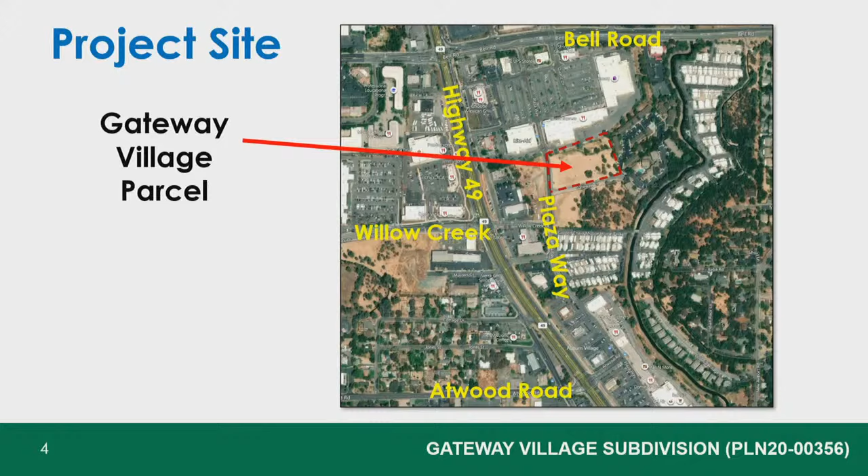So this project is located not too far from us today. It's just over to the east of us, right behind the Rock Creek Shopping Center. As you can see here, we have Bell Road, Highway 49. This is an undeveloped parcel next to some existing apartment complexes. It is just under 3 acres, 2.94 acres.

As you can see, this is an aerial of the project site. And in the middle, just to point this out for you, they are stockpiling soil out there, and they did get a grading permit prior to that, so they got all the proper permissions, just to give you a good idea of how the project stands today prior to development. And there's some on the north and the east sides, there's some existing oak woodland.

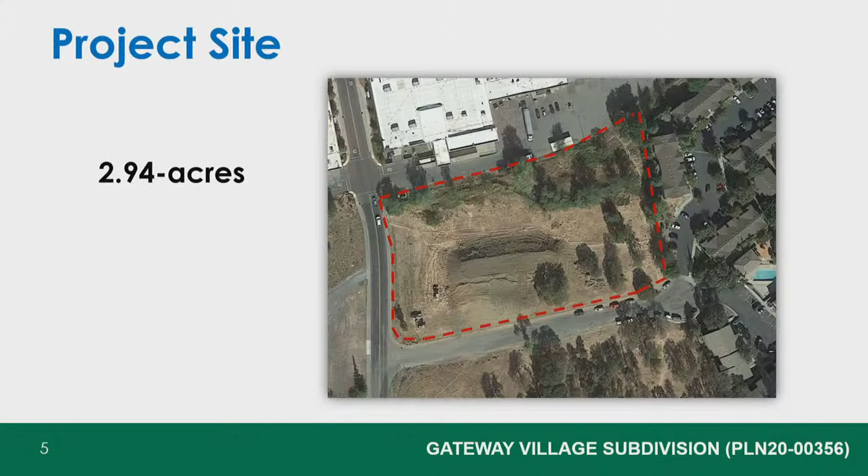This project is within the Auburn-Bowman Community Plan and is designated commercial. So commercial land use is adjacent to the west, north, and south, and to the east is high-density residential. Next is the zoning. So this parcel is zoned commercial planned development, combining design scenic corridor, combining airport overflight zone. And again, to the west, north, and south has the same zoning, and to the east is residential multifamily.

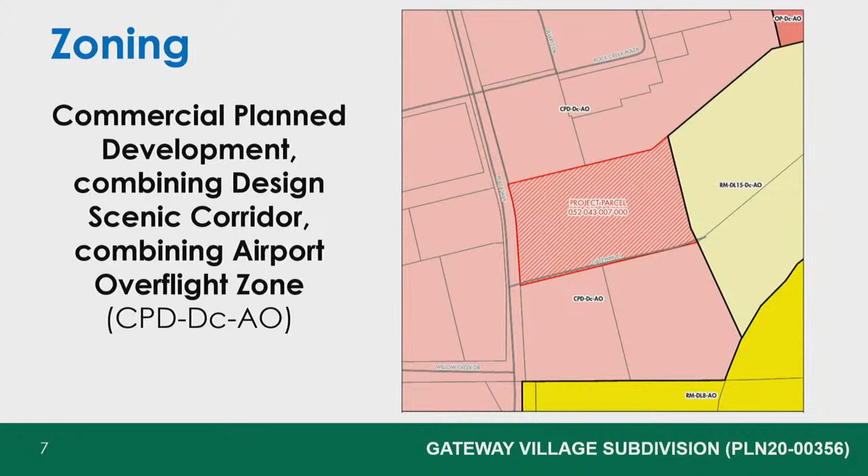So here's a bit of a zoom in to the vicinity map. You can see some of the apartments and some of the commercial development nearby. To the south, we have the Gateway Commons. This is a subdivision that came to you a couple of years ago. They just recently started construction on that, so construction is full steam ahead. To the east, you see the apartments over there. To the north, Rock Creek. Then there's some undeveloped parcels adjacent to the west and the southwest.

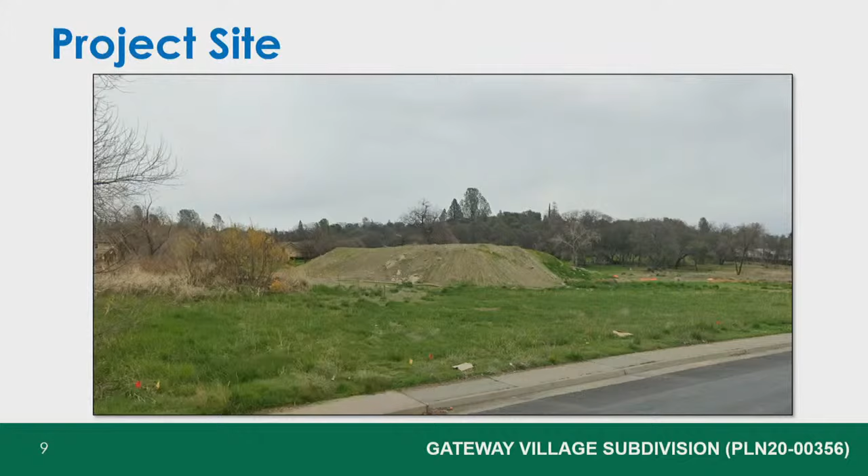Here's some photographs of the site. As you can see, the soil stockpile is very prominent. It does have some habitat, but it's urban habitat, very fragmented. To the west is Plaza Way, and to the right, Gateway leads to the adjacent apartments.

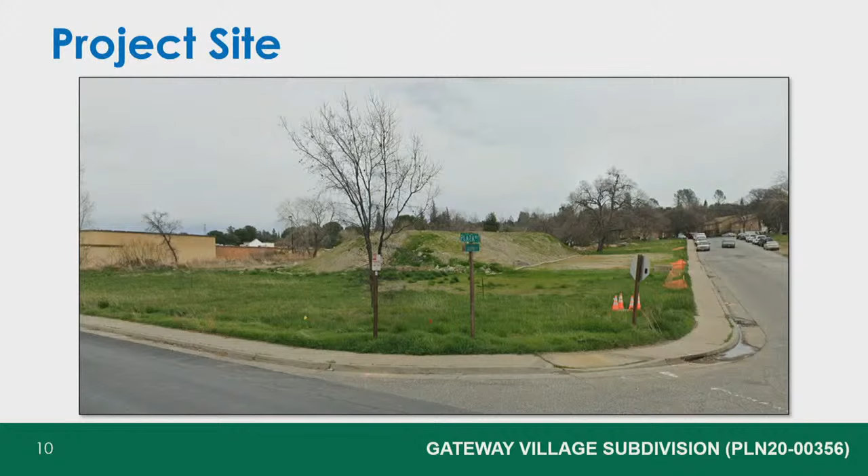I wanted to overlay the subdivision on the aerial just to see the physical impacts of this development. As you can see, it's mainly grassland and the disturbed area where the stockpile is, but you can see the amount of trees that will be removed with the project.

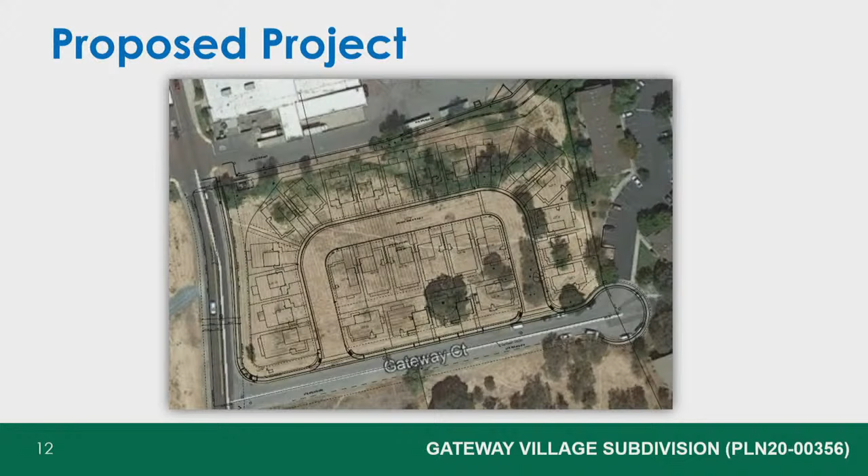The requested entitlements include a rezone from the commercial planned development combining design scenic corridor and airport overflight to the same district, but adding the town center commercial. Next is a tentative subdivision map to divide the 2.9 acre site into 24 residential units, and a conditional use permit to allow for a master planned detached single-family residential project within the CPD zone.

Going into a little detail about the town center combining district - this allows for a variety of housing types along commercial uses. With this district, you would need approval of a conditional use permit as well, and the development standards for the site are established through that conditional use permit. So with the TC combining district, detached single-family dwellings would be allowed on this parcel.

So 10 feet to the entrance to the home, 20 feet to the garage. Rear setback is 3 feet. Side setback is 3 feet as well, and a lot coverage of 50%.

Here are some of the house plans. This is one of the smaller ones, 2 bedrooms, about 1,000 square feet. These have a 2-car garage. The architecture style will match the Gateway Commons project as well, with the stucco and the stone columns.

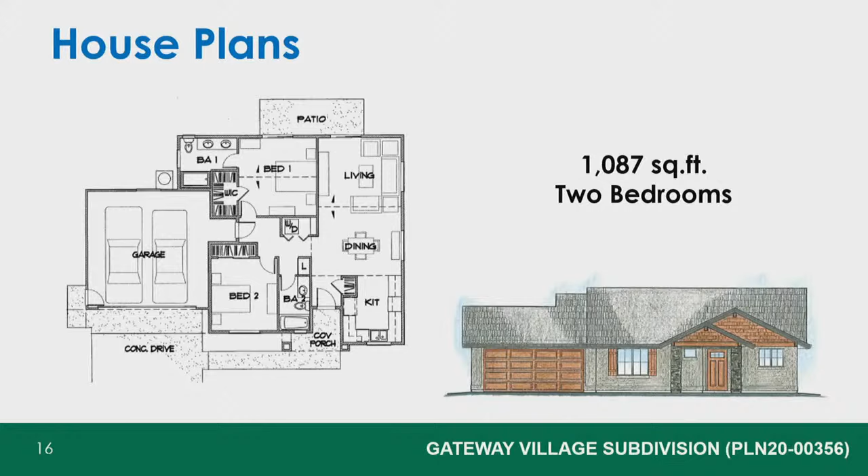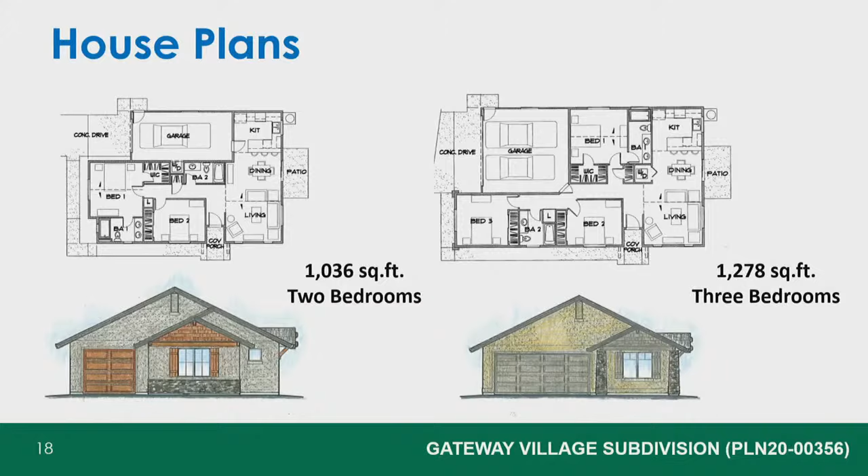Next is the 3-bedroom, almost 1,600 square feet with a 2-car garage, and this one is 2-story. A couple more - we have the 1,000 square foot 2-bedroom with a 1-car garage, and about a 1,300 square foot 3-bedroom with a 2-car garage. They all have different colors, but the scheme is similar with the stucco and the stone columns.

The project along the frontage also proposes landscape - they have shrubs, trees, and ground covers. All will have to be compliant with our water efficient landscape ordinance.

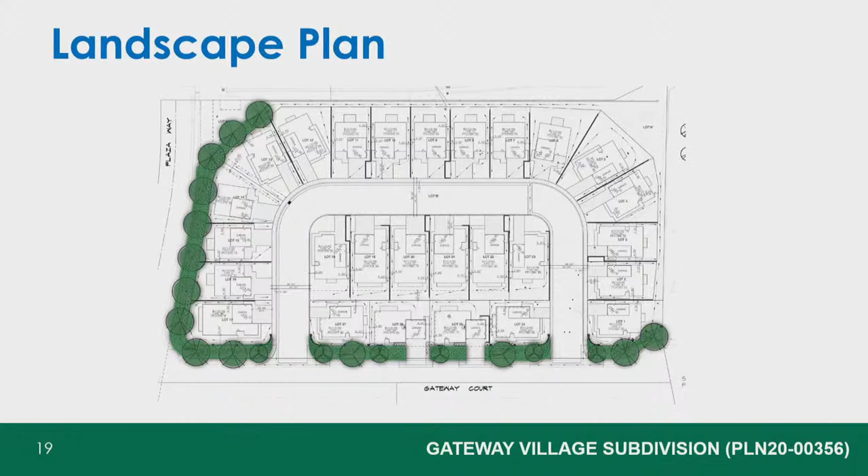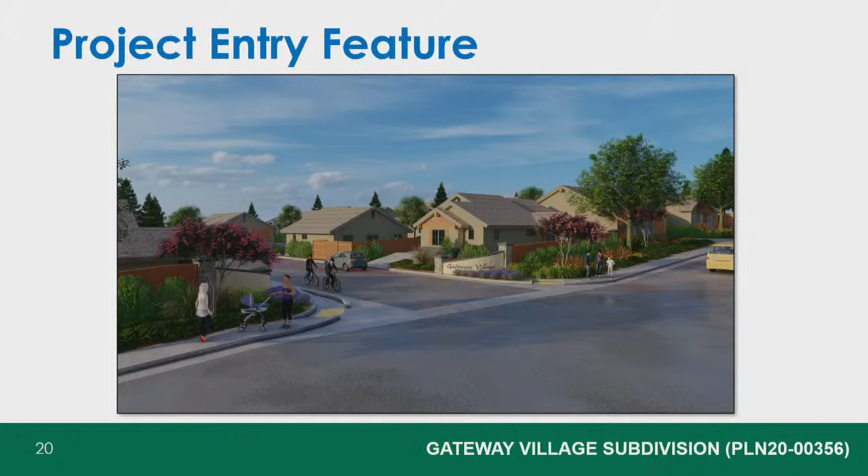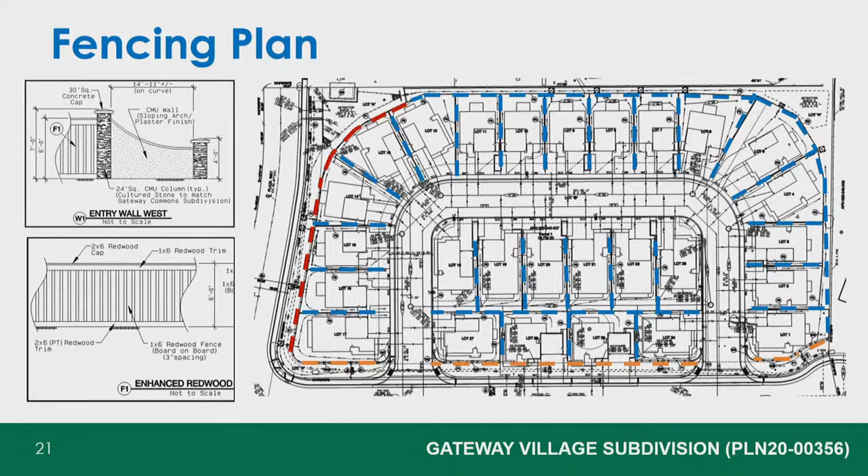That photograph did have some fencing, but going into a little more detail - on the south side of the site, we'll have the W1 call out, which will have the redwood fence with stone columns and the entranceway where we'll have the sign. To the west, along the frontage of Plaza, we'll have enhanced redwood fences with a cap on top. To the north and east side, and within the individual homes, we'll have redwood fencing. There is an existing fence along the property line to the east.

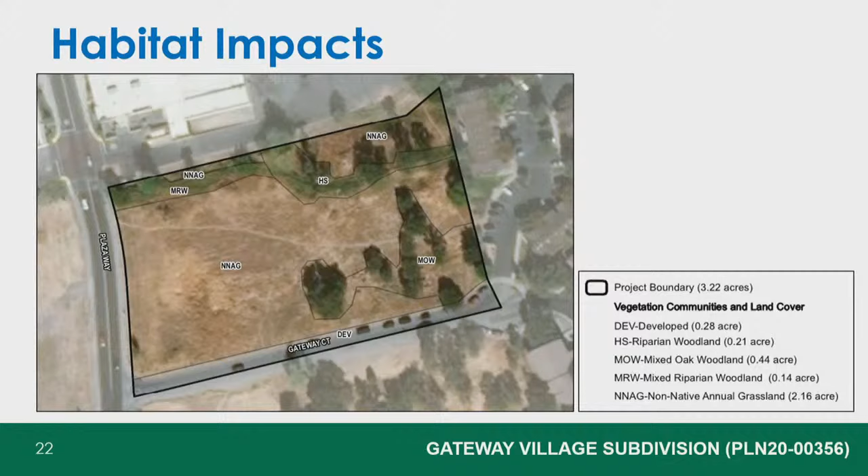Okay, so we did analyze the traffic with this project. The residential development is allowed in the zoning district, and the land use and trip generation is expected to be consistent with that zoning. The project is proposed to have about 255 daily trips.

We did do a VMT analysis under CEQA, and since the type of project, market rate affordable housing, is also in a low VMT generating area, it would be screened out for VMT because of the low VMT.

In terms of low VMT, due to its location, there's a lot of amenities nearby. We have grocery stores, restaurants, all which can be walked to. So we did go on the walk score. This is basically a website you can go on, type in your address, and it rates the parcel's location based on proximity to transit and destinations.

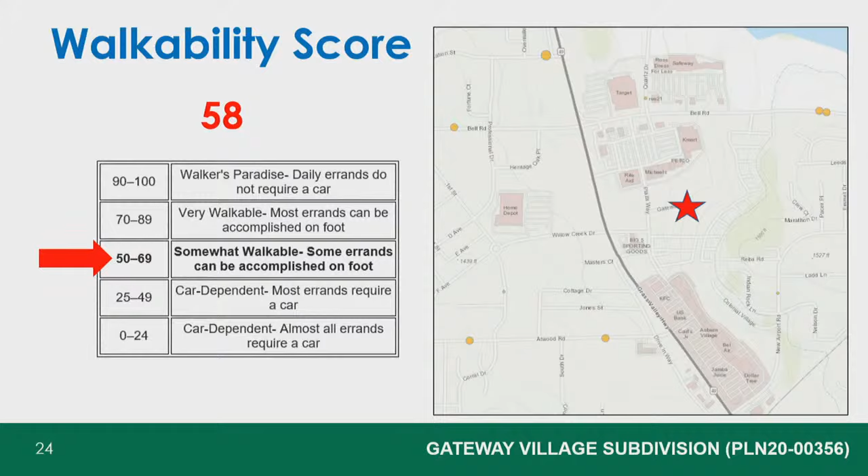So we got a score of 58, so it's somewhat walkable. Some places will be walkable. Where the old Kmart building is, we'll have a grocery store there, and Harbor Freight and Old Navy. So we have some more destinations coming in that this may not have considered because they're under construction now, but it is walkable. There's a sidewalk right in front of the project, so folks can walk and avoid vehicle trips.

So some additional information of what this score is based on - there's dining, shopping, and groceries nearby.

So this went to the MAC as an action item on June 14th. Some of the items that were raised from the MAC were the affordability of the units and the type of deed restrictions. As I said at the MAC, these won't be deed restricted, they'll just be affordable by design. So the MAC recommended approval, 5 to 1 to 1.

Second, approve a rezone to add the town center combining district to the site, and approve the subdivision map, which will allow for a subdivision of 2.94 acres into a 27 lot residential development, and approve the conditional use permit for a detached single-family residential development within the town center combining district.

This is subject to the findings and conditions of approval in the staff report in the errata. I am available for any questions.

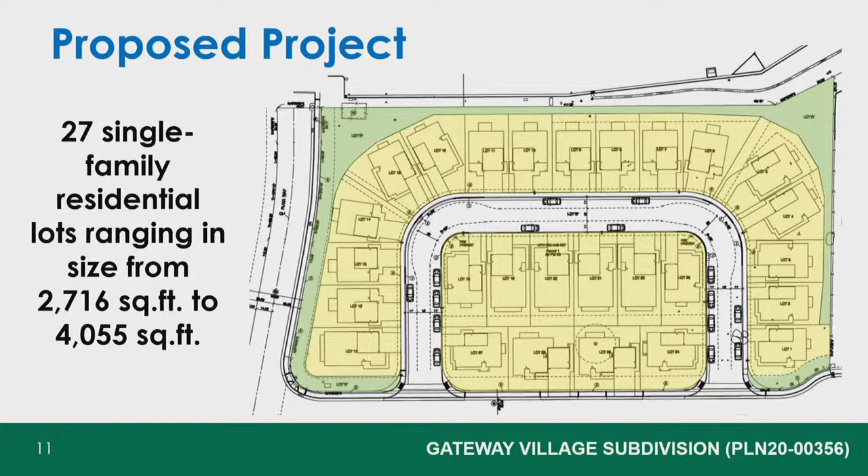Okay. That was my only question. Thank you, appreciate it.

Just curious, Bennett, what are the price range they're looking at selling these for? So I did discuss that with the applicant. I think with the construction logistics right now, they just don't have a firm price, but I think the intention of the project is as low as possible, just to be an attainable housing project. So it's something they're working on, but with ever-changing construction costs, I don't think they have a firm number.

And then another question, I guess, for you or for EJ's. I believe this is going to be a recommendation to the board because we're looking at modifying the zoning code. That is correct. Okay.

One more question on the drainage. Who's gonna maintain that? The homeowners association.

Okay, thanks. Bennett, just a quick question, really more education than anything else for me. Gateway Court is a private road, right? So what I'm curious about is, and there was a recommendation in one of the letters that came in that said the county should probably take this road over with this project. So I'm just curious about how that works when you have this private road and a new development going in here. Are there any rules that apply from a county perspective?

Is there any point at which we might consider taking that over? How does that work? All right, Phil Franz again with Engineering and Surveying.

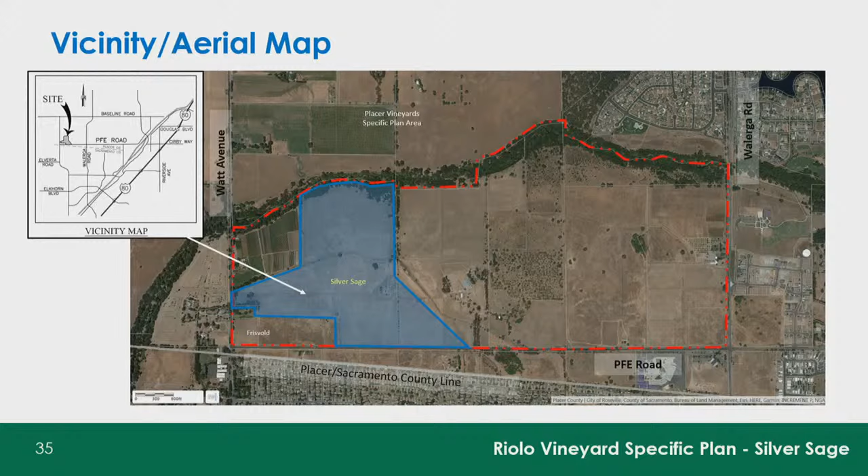The item before you today is the Silver Sage Subdivision, a Phase 3 project under the Riolo Vineyard specific plan. I'll start with an overview: it's located in the southwest portion of Placer County within the Dry Creek West Placer Community Plan area. This map shows the Silver Sage property in relation to the specific plan area, located north of PFE Road between Watt Avenue and Walerga, with Dry Creek forming the northern boundary.

The Silver Sage property is zoned Riolo Vineyard specific plan, similar to most other properties in the specific plan area. The plan covers a total of 525 acres, with ultimate development of 933 residential units over various phases, including open space, recreational, agricultural, and commercial uses. It was approved in 2009, subsequently amended in 2015 to address land use and zoning modifications. The plan went through a comprehensive environmental review, including certifying an EIR and a later addendum to address the updated specific plan. Water, sewer, and drainage master plans were also prepared.

Since 2009, three subdivisions have been approved and are under construction. Mariposa is near completion with 107 single-family residential lots, many of which have since been sold. Glen Willow will have 177 lots, and Mason Trails will have 170 lots. The Frisvold subdivision is currently in staff review, located just southwest of Silver Sage, and will have 118 total residential lots.

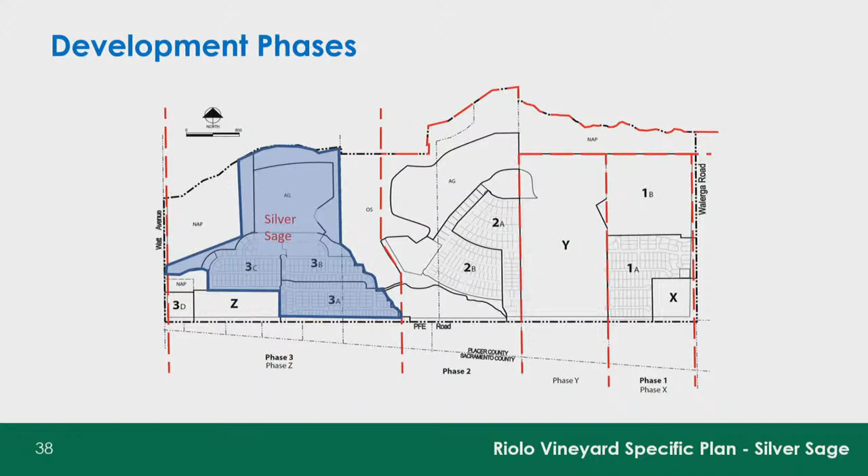Development under the specific plan is occurring through several phases in an east to west direction. Mariposa was the first phase, Glen Willow followed as phase 2, and Silver Sage will be phase 3. Other phases include Mason Trails and Frisvold.

There are two entitlements associated with the Silver Sage project: a tentative map and an administrative modification. The tentative map encompasses 113.9 acres and will include 163 low-density residential lots, as well as 117 medium-density residential lots, ranging in size from 2,200 to 5,500 square feet.

On-site amenities include 2 neighborhood parks, an agricultural lot located north of the proposed residential development, which would allow row crops or grazing and would be owned and maintained by the HOA. There's also an open space lot and a wetland preserve lot located to the northeast of the property. The 2 points of access on the property would be off of PFE Road on C and G streets.

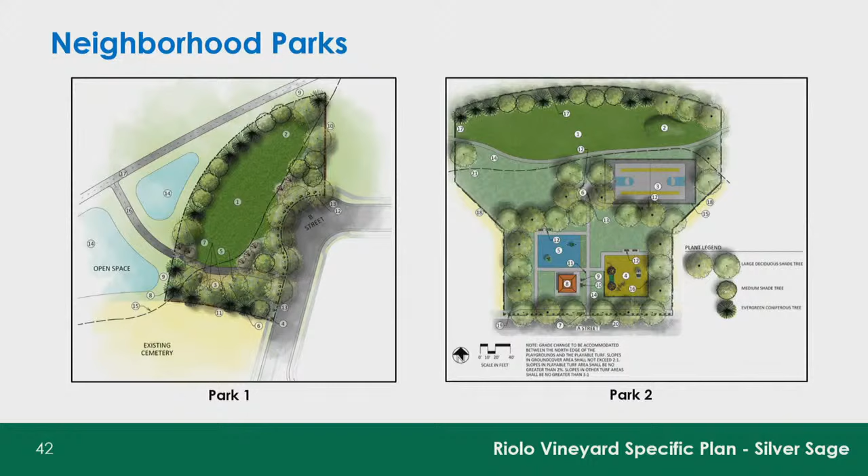This slide shows a detailed view of the two neighborhood parks. Park 1 is on the west side of the property, approximately 1 acre, and will include a pedestrian path linkage to a Class 1 trail that ultimately goes to Dry Creek to the north. Park 2 is approximately 2 acres and will include a basketball court, open turf play area, and tot play area. It also includes a path providing connection leading to Dry Creek.

Here's the fencing plan for the subdivision. Along PFE Road, there will be community wall fencing, basically a CMU brick wall with stone veneer, similar to what's been constructed for the adjacent subdivisions. There will be open view fencing for the residential lots facing the open space, which is your typical black wrought iron fencing. The open space areas will have standard post and cable fencing, and lastly, the agricultural fencing would consist of a 3-rail wooden fence.

There they are, sorry about that - I was wondering where they were coming from. So you can see the different fencing types here.

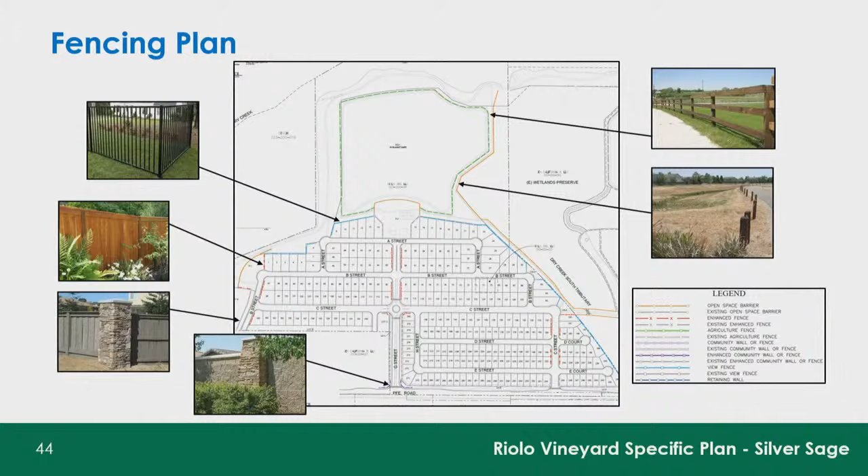With regards to CEQA compliance, the project is considered consistent with the previously certified Riolo Vineyard Specific Plan Final EIR and Addendum. It meets the criteria in Public Resources Code Section 21083.3, and none of the conditions in CEQA Guidelines Section 15162 through 15164, which would require preparation of additional environmental documentation, would apply.

In terms of public outreach, the project was presented to the West Placer MAC on May 8, 2019 as an informational item. At that meeting, concerns were expressed regarding accommodating equestrian use on the trails and available options for managing the ag and open space. We went back to the MAC on November 13, 2019 as an action item. No concerns were raised at that meeting, and the MAC voted 4-0 with 1 absent to recommend Planning Commission take action to approve the project.

Since the applicant came forward with the administrative modification afterwards, staff presented the project once again to the MAC on May 18th of this year, and again the MAC voted 4-0 with 1 absent to recommend that the Planning Commission take action to approve the project.

Staff recommends the Planning Commission take the following actions. The first action is to determine the potential impacts of the proposed vesting tentative subdivision map, which is part of the Riolo Vineyard Specific Plan, are within the scope of the analysis of the Riolo Vineyard Specific Plan Final EIR and amended 2015 Mitigation Monitoring and Reporting Program.

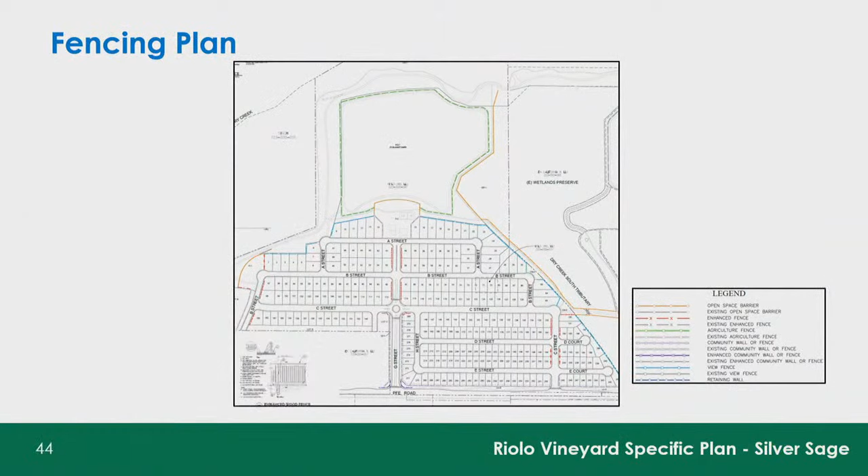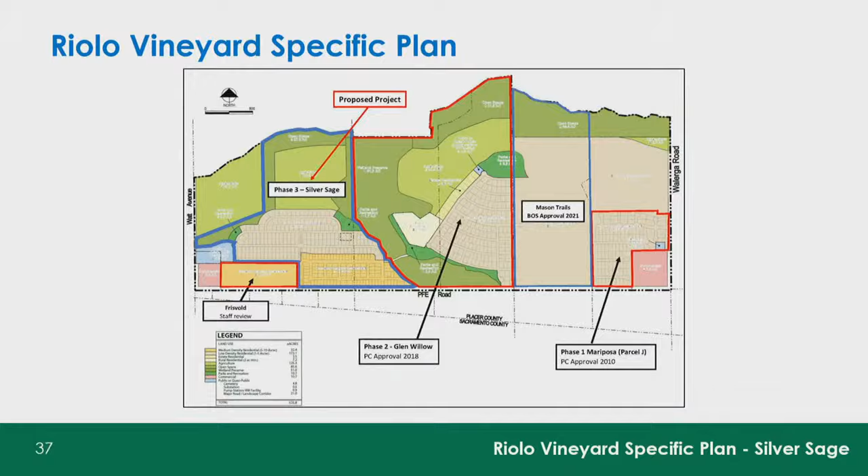You're probably referring to the old, prior to the 2015 update, specific plan. I know that originally the roadway was actually on the perimeter along Dry Creek Trail, so there was a road connecting all of the subdivisions. I could go back to the slide of the specific plan. So when the specific plan was updated back in 2015, that just basically went away. There was a roadway, I believe the main connection, above the northern boundary. So that was all redone with the 2015 update.

So really, as far as connections to the adjacent subdivisions, there's just a pedestrian connection to Glen Willow to the east, and connections to Frisvold, over to the southwest. The main connection will be PFE Road, to access Mason Trails and Mariposa. Okay, so that was all changed the last time we considered the specific plan? It was, right. Okay, well, that does it for me.

Anybody else? Okay, well I'll bring it back to the commission for any discussion or any actions the commission would like to take. And for purposes of these recommendations, items 2 and 3, hopefully I can save you some time. That would just be approve the map subject to the conditions and findings, and approve the administrative modifications subject to the findings, so you don't need to reiterate all of those.

I'm ready to make a motion. I move that we determine the potential impacts of the proposed vesting tentative subdivision map, which is part of the Riolo Vineyard Specific Plan, are within the scope of the analysis of the RVSP FEIR and amended 2015 Mitigation Monitoring and Reporting Program. Second.

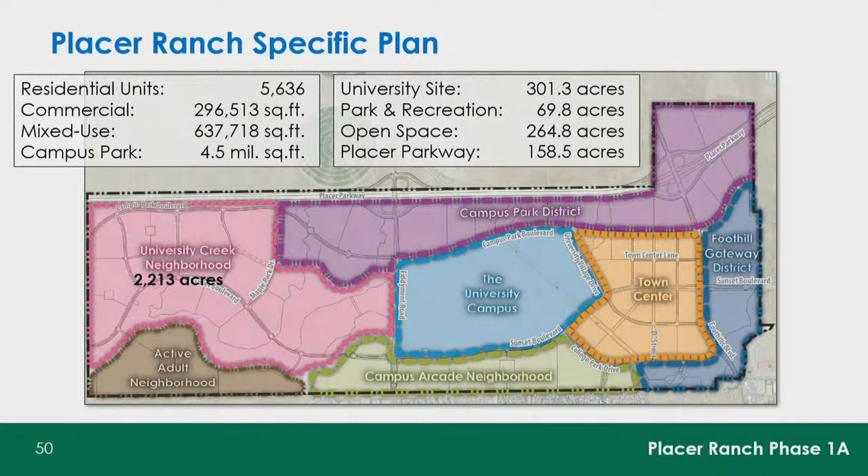This is the first phase of Placer Ranch. It's 193 acres immediately north of the city of Roseville, all developed with residential single family. This is the existing Fiddyment Road. The landfill here is about 4,000 feet north of the site, and this is considered Phase 1A. The whole plan area is going to be developed by phase. 1B and 1C would be to the east, and those are upcoming. Then as the market dictates, development will happen throughout the project area.

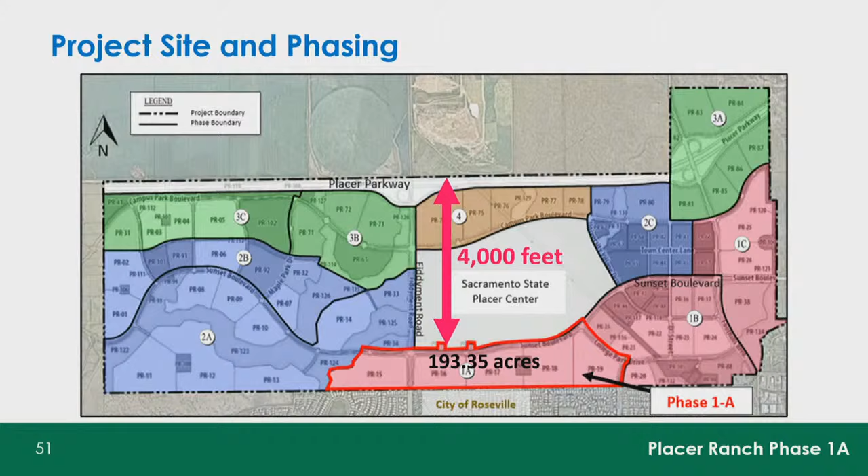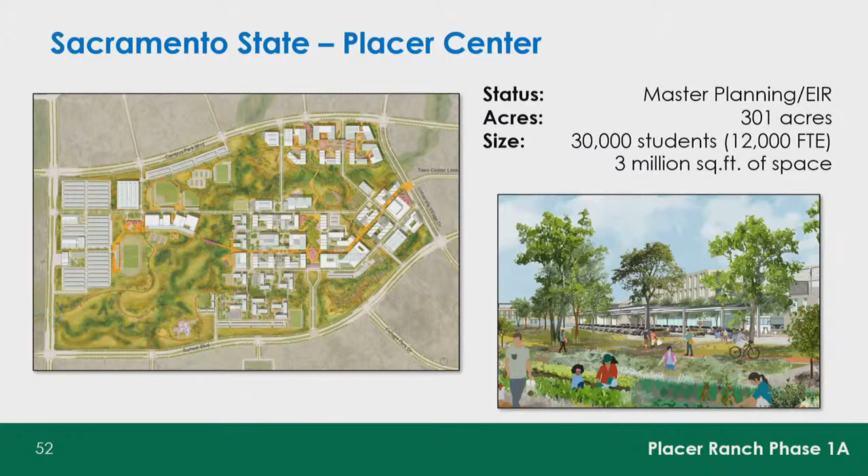These first residential neighborhoods are south of the future Sac State campus that is undergoing master planning by Sac State. They also are doing their own EIR. That's 301 acres. This is a conceptual plan of what they're looking at, a lot of open space. Eventually 30,000 students would be accommodated on site with 3 million square feet of building space.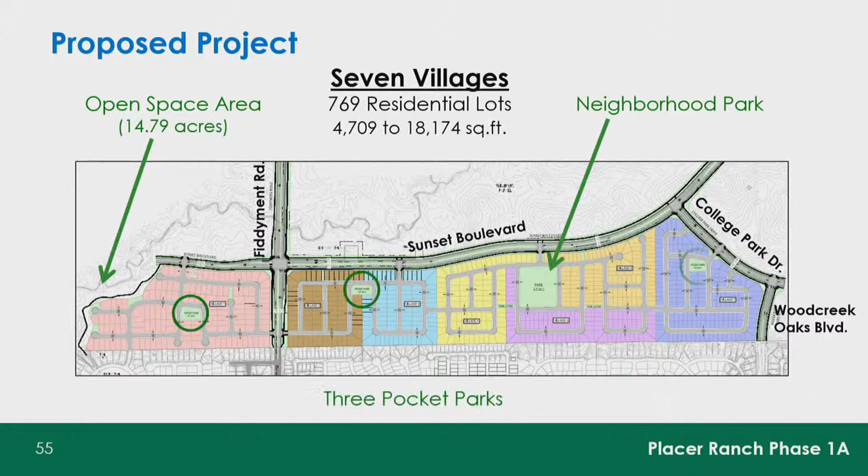Two entitlements are being requested: a vesting phase small lot tentative subdivision map to subdivide the site into 769 single-family residential lots, and also an administrative modification of residential unit transfer to transfer 14 residential units between specific plan parcels. When the Placer Ranch specific plan was approved, it was designed to be flexible, so a future developer or applicant can request to transfer residential units between the large lot parcels. Each large lot parcel is designated a density or commercial space, so you can transfer between like designated sites, low density to low density, medium to medium.

So what they're asking to do is transfer 14 lots from a parcel near the town center to the Phase 1A project site. Normally, the planning director can approve that if there's not more than a 20% change, increase or decrease, in the unit count on a parcel.

The proposal here is a 22% change on one of the large lot parcels, so the planning commission has to approve that transfer.

Here's that parcel, large lot parcel 15, it's reduced by 22% because this is the village that has the largest proposed lots. Therefore, the planning commission needs to approve this. And here's the transferring parcel. Large lot 24 is declining by 14 units.

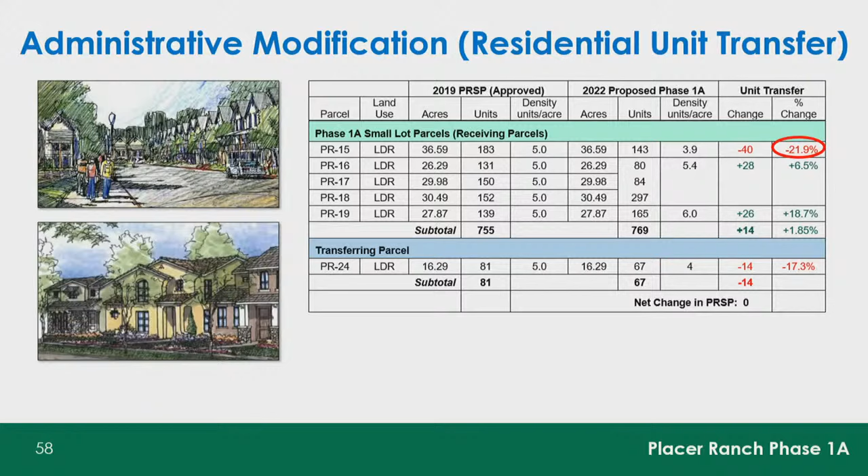So everything here is low density residential. Here's the transferring parcel, also low density residential. So development standards for the specific plan were established with the adoption of the plan.

We have development standards and design guidelines that this project would comply with. Various lot sizes proposed, ranging basically east to west, small lots to larger lots - 4,900 square feet on the east, 7,200 square feet on the west. So this project's about 4 units an acre. The low density residential development standards in the plan, that density range is 1 to 7 units per acre, so we're about midway in what's allowed here. These are development standards established in the specific plan this project will comply with.

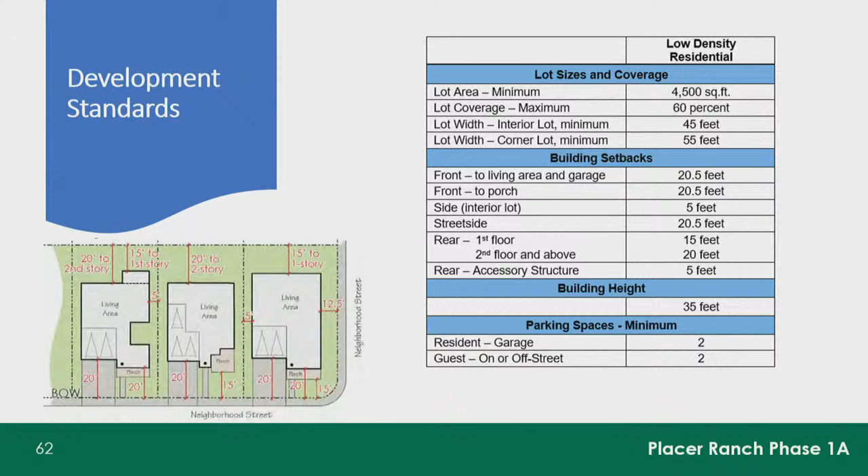Just an overview of the proposed parks. This is the large neighborhood park. It would be required to be constructed no later than 18 months after the start of construction of this residential phase. It'll include a ball field, a soccer play field, a clubhouse, some basketball courts, pickleball courts. So this is conceptual, but this is the look they're going for and the amenities being proposed.

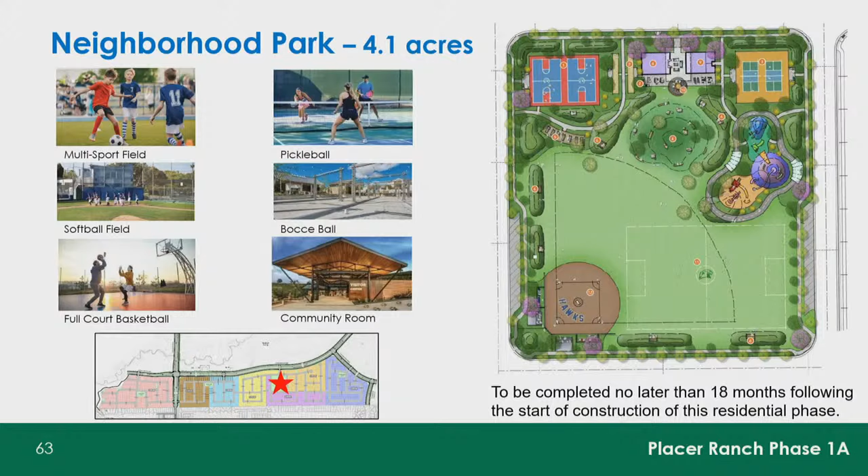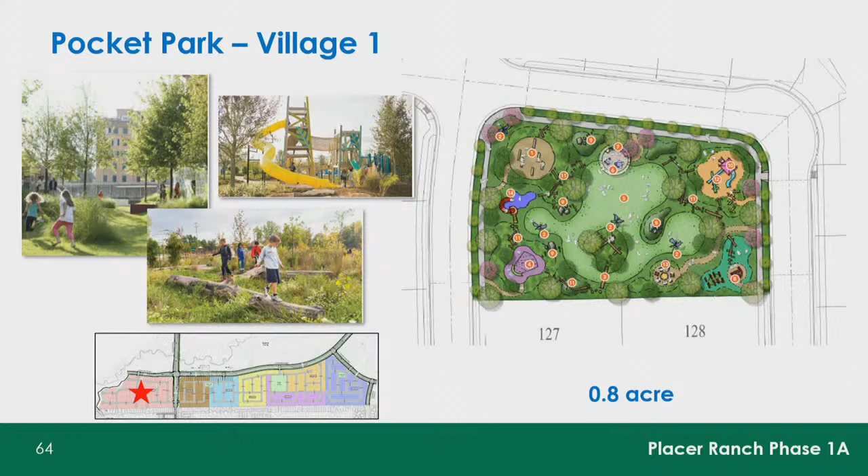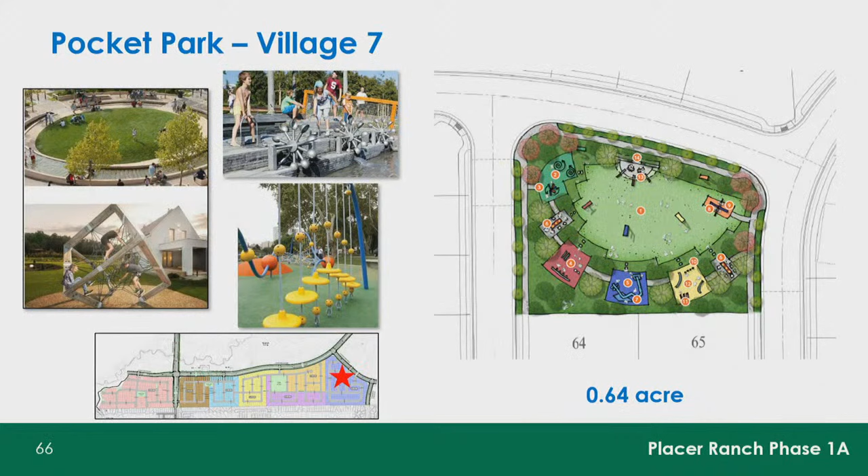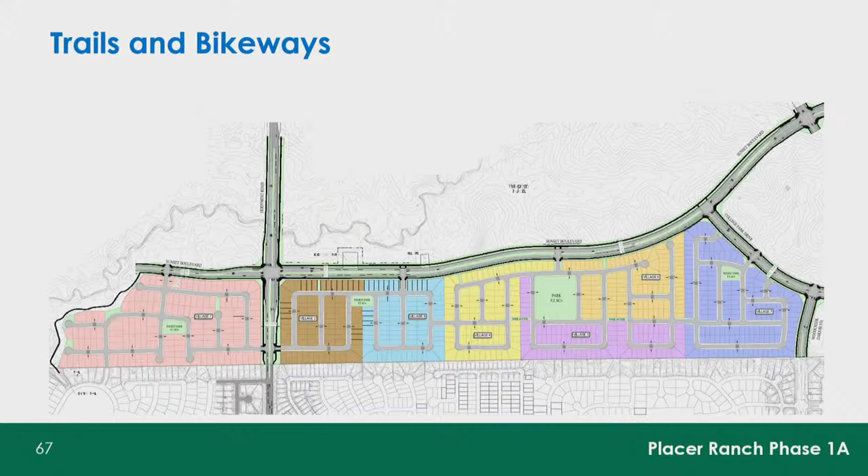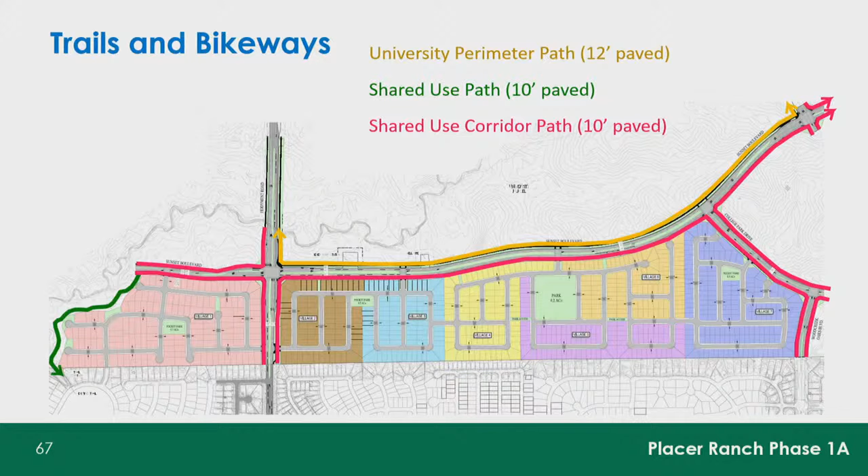So this project has been designed in compliance with the master plan for Placer Ranch to be very pedestrian and bike-oriented. Surrounding the university will be a 12-foot paved path, a shared use path in that open space area. All the road corridors will have a 10-foot paved sidewalk. And then on-street, class 2 on-street bike lanes on the major roads.

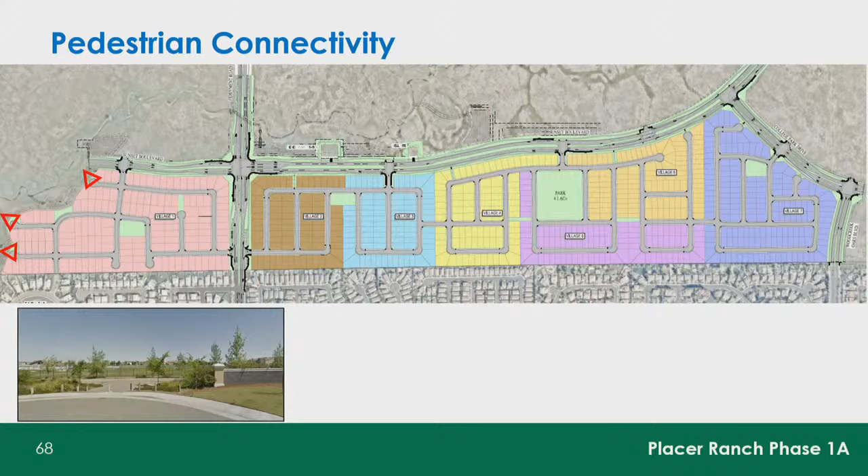So pedestrian connectivity has been designed into the overall layout. Along that open space area, there's 3 cul-de-sacs. There'll be view corridors into the open space, so not homes backing up to that for the most part, but there'll be pedestrian connections out to that proposed trail.

Internal to the project, there'll be pedestrian pathways connecting some of the neighborhoods. On the east end of the site, there's 3 cul-de-sacs that will also open up to the main roads, so you can view into the neighborhoods, and also pedestrian connections out to Sunset Boulevard here from the neighborhoods.

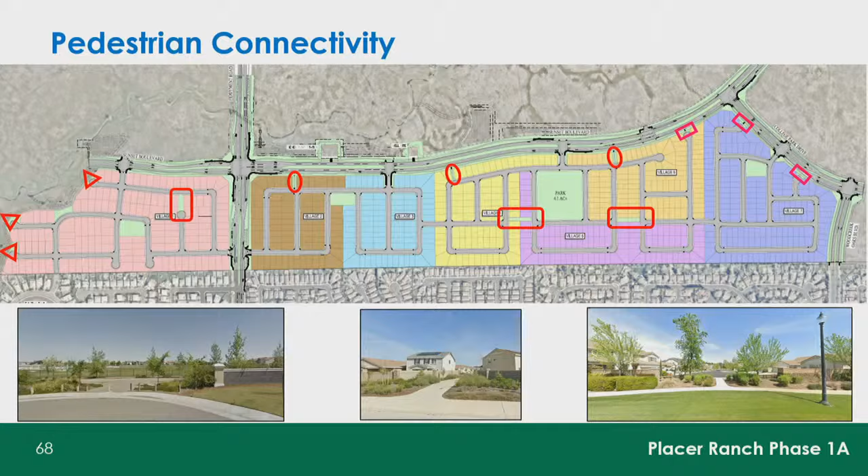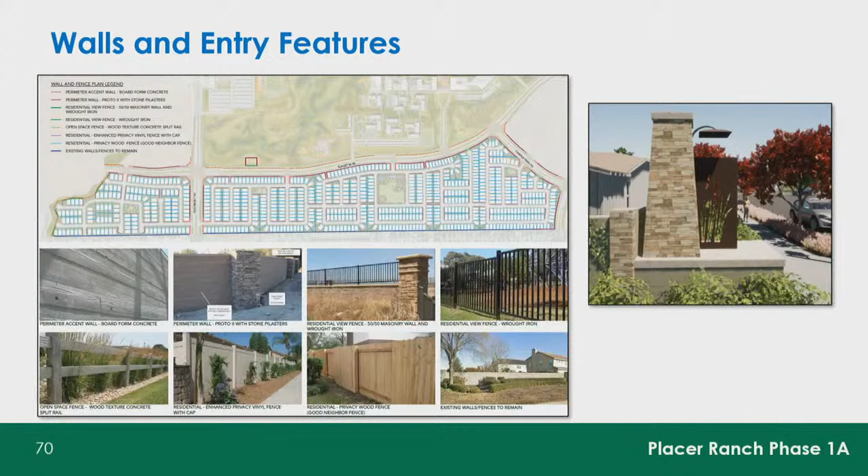So the project has prepared a pretty robust landscape plan for the road corridors. They've proposed a series of various types of fencing and walls throughout the project site. And also in compliance with the area plan, they're proposing gateways.

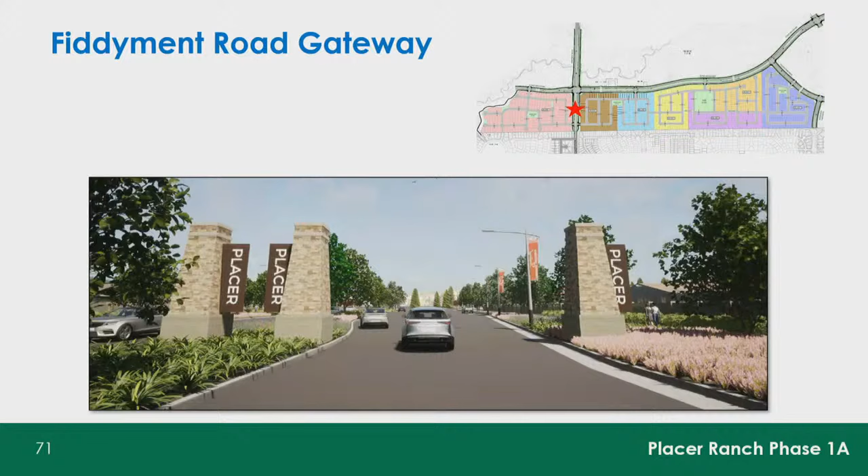So this would be the main entryway northbound out of Roseville into the Placer Ranch site, with some decorative pillars. There'll also be secondary gateways in 3 locations in the project area. And then community monuments, mostly at the entrances into individual neighborhoods.

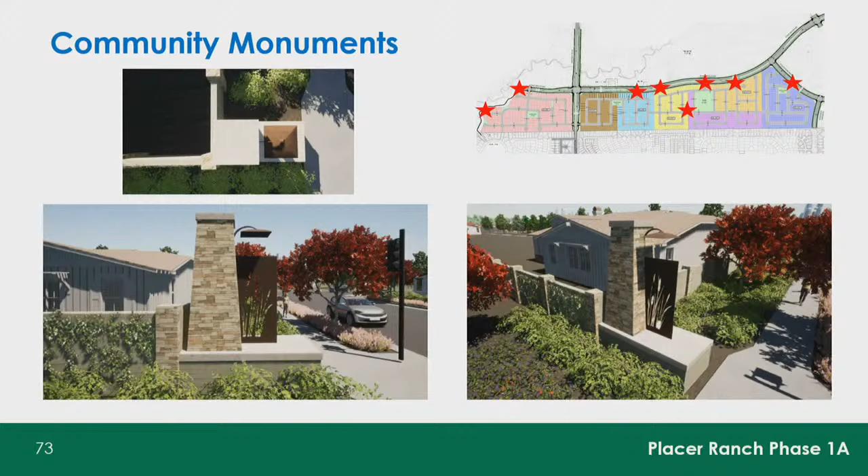So habitat on site is mostly grassland. It's a vernal pool complex. So there is 5.5 acres of wet area, vernal pools and wetlands, and about 3.5 acres of that would be disturbed by the project.

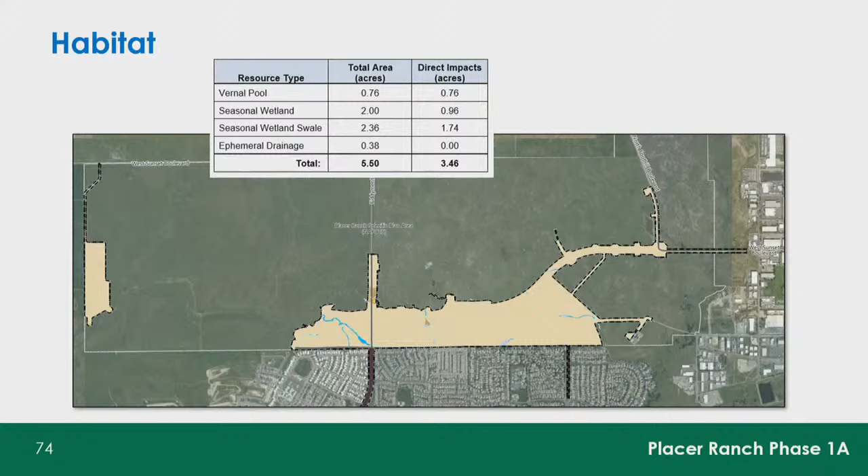This may be a first for me that there's no trees being removed from a project site. Just want to point that out.

So the Placer Ranch specific plan build out was anticipated to generate about 216,000 daily trips, including 13,000 AM peak hour trips and 17,000 PM peak hour trips. This was deemed to be significant and unavoidable VMT, and that holds today.

But we did have a traffic analysis done due to the shifting of those 14 units, to just make sure that this didn't mess up anything that was found in the EIR. So it was a consistency assessment. Based on the small configurations that are changed, some roadway alignments, and maybe some pocket depth changes, and the unit transfers, they weren't considered consequential to the study that was done as part of the Sunset Area Plan traffic impact analysis.

The homes are being built on fairly busy roads that are proposed, so there will be sound walls, as you see here in red.

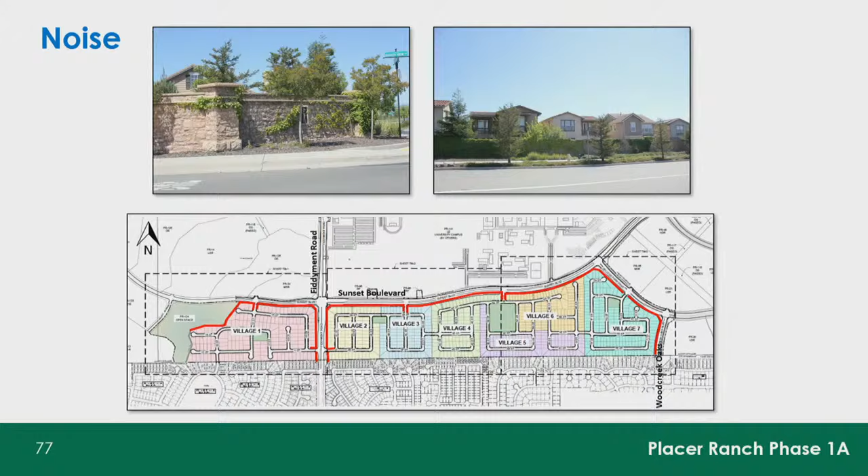A whole bunch of backbone infrastructure is required. Sunset Boulevard will be extended eastward from the existing terminus at Sunset and Foothills—that's the sharp turn you make heading up towards Athens. College Park Drive is a new road, so they're building that first segment. Then Woodcreek Oaks north out of Roseville, this short segment, and widening of Fiddyment here.

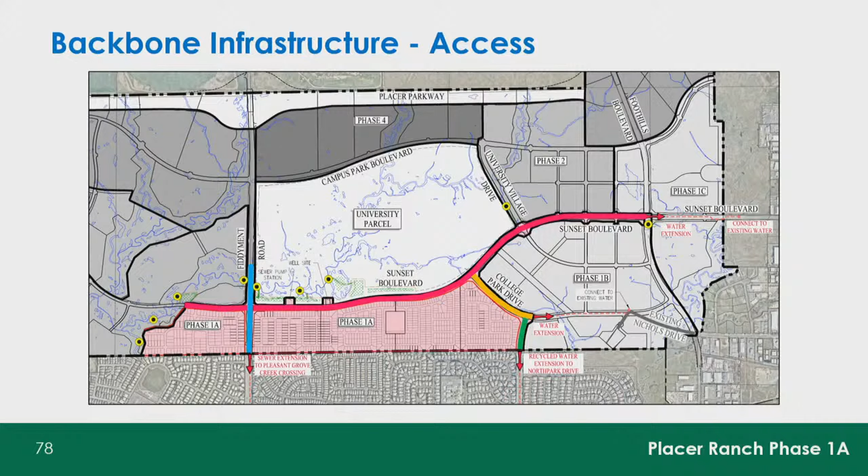Nine traffic signals for information. As backbone infrastructure, Woodcreek Oaks Boulevard will remain barricaded. This was a concession made by the applicant and city in negotiations with the City of Roseville, who didn't want a whole bunch of new traffic funneled down both Fiddyment and Woodcreek Oaks. So the applicant has to widen Foothills Boulevard to the east, and once that widening is done, this barricade would be removed. That Foothills Boulevard expansion needs to be completed prior to the 1,000th residential building permit, so this first phase will not trigger that—it'll be either 1B or 1C.

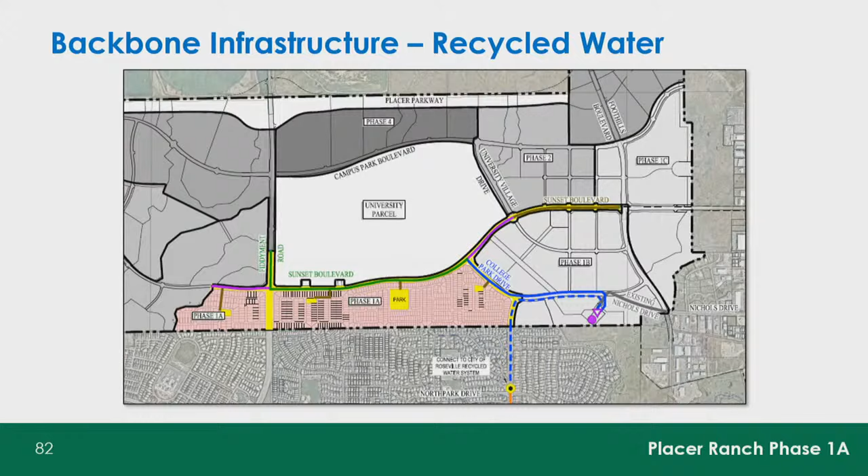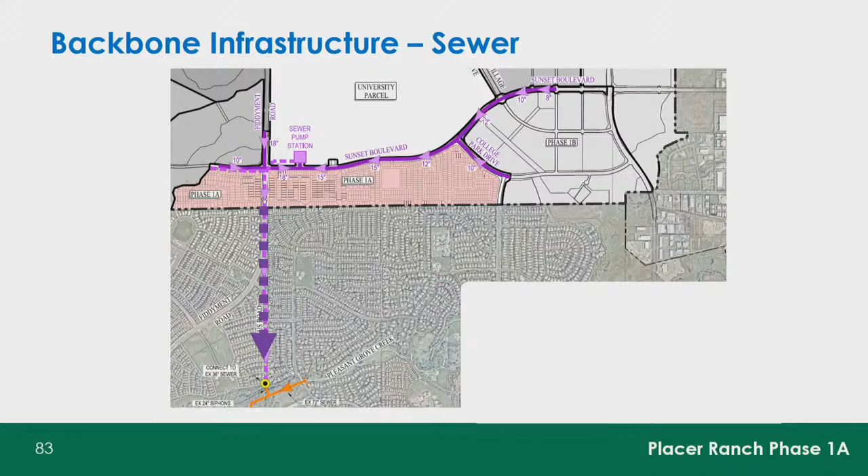Water infrastructure will connect to existing water in the Sunset area, also to City of Roseville's water system. We'll also be adding a recycled water system, connecting to the City of Roseville's recycled water system, which will serve the parks and the landscape along the frontages. Sewer being installed by the applicant will connect to the City of Roseville, tying into a trunk line along Pleasant Grove Creek and then heading west towards the Pleasant Grove wastewater treatment plant in the City of Roseville.

The applicant is also doing backbone infrastructure for regional sewer in the Sunset area, connecting the casino along Athens, southerly along Foothill through Placer Ranch, to connect to the City of Roseville. It's a multi-million-dollar project, and the county is funding $28 million of that sewer work through ARPA funds, which is federal money. Eventually, a major water line extending from City of Rocklin will supplement water service out in this area.

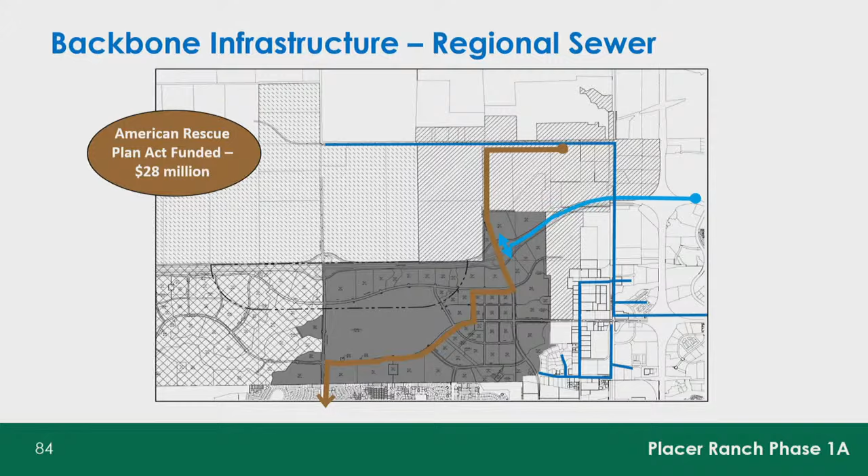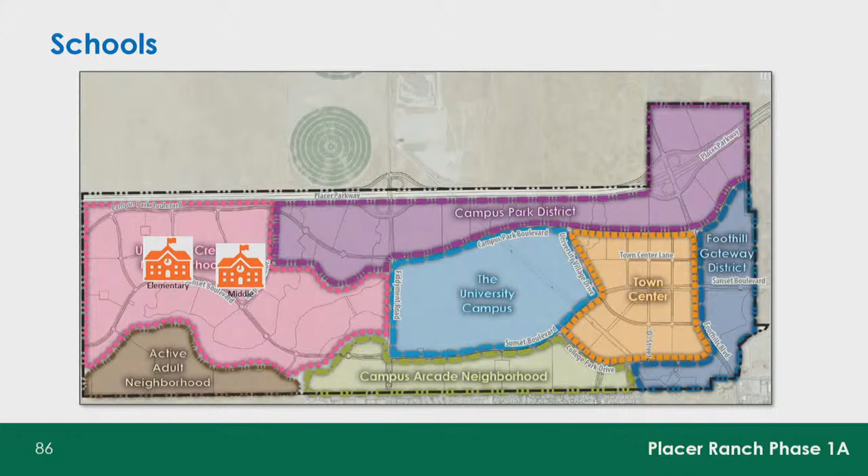Fire service is provided by an existing fire station next to the casino. The project applicant is required to dedicate a future fire station site on the west side of the university campus along Fiddyment. No schools are proposed within this first phase, but there is an elementary and middle school in later phases. High school students will attend Roseville High School district schools, either Roseville, Woodcreek, or West Park High Schools. And of course, you've got the university at the center of the master plan area.

This project has a substantial development agreement with a whole bunch of mitigation fees, mostly for transportation. It also includes stormwater, community recreation, economic incentives, Placer Parkway fees, Highway 65 fees—you name it, they're paying it.

The specific plan does have affordable housing requirements, and you can see them here. It's not required to build in this first phase, but as the project progresses, they do have milestones they need to meet as far as affordability and homes actually built.

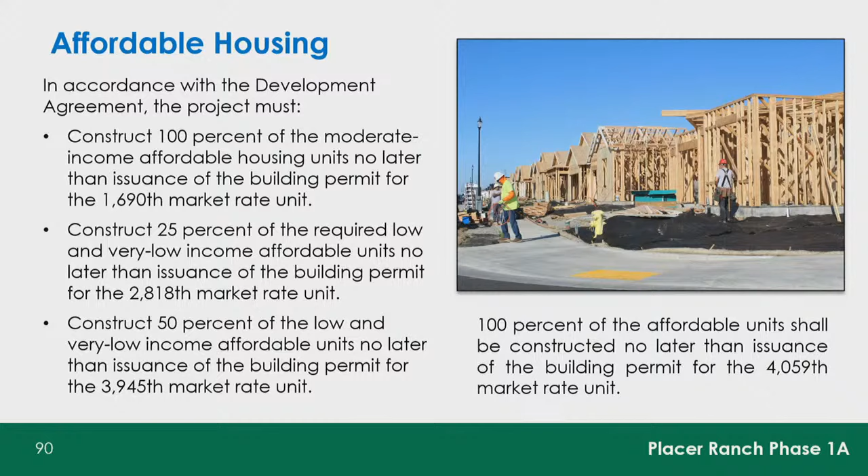The Placer Ranch plan did undergo an EIR, so project-level environmental review was done, and that EIR was certified in December of 2019. The balance of the Sunset area was at a programmatic level, while the ranch was at a project level. So all the recommended feasible mitigation measures previously adopted have been included as conditions of approval for this project.

With that, county staff recommends that you determine the proposed project—consisting of the specific plan modification and vesting phased small lot tentative map—is exempt from CEQA pursuant to CEQA guidelines sections 15182 and 15183, on the basis that it is consistent with the previously adopted Sunset Area Plan, Placer Ranch specific plan, final EIR, and mitigation monitoring reporting program. Also approve the Placer Ranch Phase 1A vested phase small lot tentative subdivision map, subject to the conditions of approval contained in attachment 1 of the staff report, and also approve the Placer Ranch Phase 1A specific plan administrative modification for the residential unit transfer of 14 units from LDR parcel PR 24 to the Phase 1A small lot tentative map parcels. These are subject to the findings contained in the staff report. With that, I'd be happy to answer any questions.

Good day, members of the commission. Anton Garcia with Taylor Morrison, the applicant. First of all, I want to thank you for your time and consideration of this project. We are very excited to endeavor this project with the county.

This morning as I was drinking coffee, I wanted to confirm the date that we purchased the property. It was August 16th of last year. So no small feat to get here, and a tremendous amount of support from the county staff to not only get here with this map, but a slew of items that I'll mention here in a bit, just to show the level of momentum we're pushing to get this project forward.

One of the things I do want to mention is as far as Sac State, we are working with their chancellor's office and their design team on all the infrastructure needed to support our backbone improvements that ultimately support theirs. They're working on their EIR right now. I think the earliest they'll be looking to get their first phase will be the 2024, 2025 timeframe. So a lot of coordination going on with their group.

We also, as I mentioned, have our Phase 1A project, but there are so many different ancillary items to not only support this but the balance of the project. Just to name a few, we're at risk on our grading plans right now. We're on our third submittal with the county for Phase 1A. Our plan, assuming we do receive your approval, is to break ground this September to be able to grade the project by the end of the year. We'll see how far we can get, and then be able to start the backbone improvements next year.

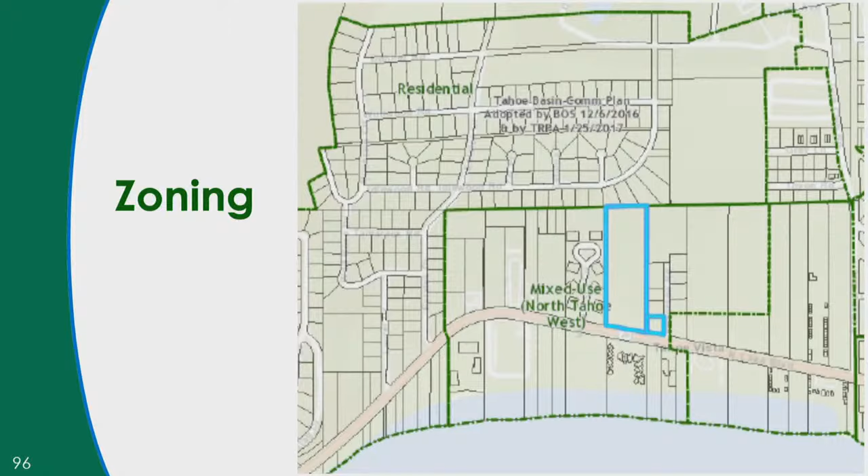In February 2012, the Planning Commission approved a tentative parcel map and conditional use permit for a timeshare project called 6731 Tahoe, which was 20 timeshare units with a pool amenity, a clubhouse with a manager's unit above, as well as 3 workforce housing units with an associated 4-lot map, 1 lot for each unit plus a common area lot. A mitigated negative declaration was prepared in 2012, evaluating potential impacts of the project for CEQA review. Through automatic state extensions and county approvals, including the last extension of time in March 2022, the final expiration date is February 2023.

I want to walk you through the 2012 site plan to help you understand the modifications that are proposed. North Lake Boulevard runs horizontally on the map here, with Anderson Road at the top of the site plan.

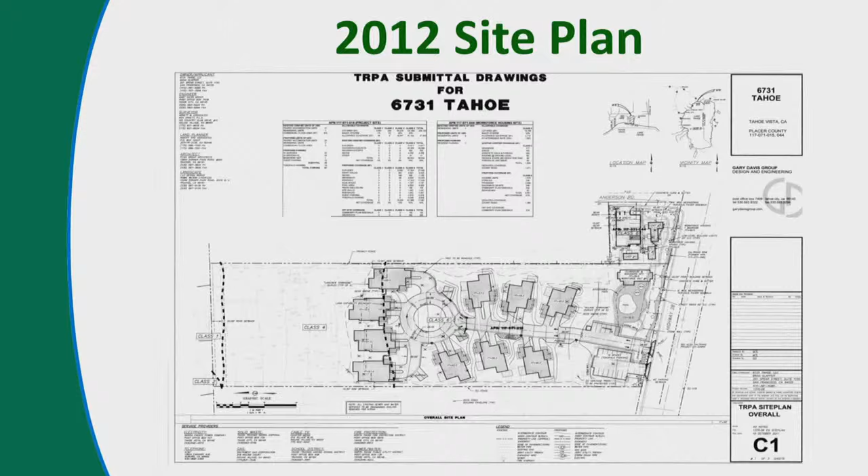There are 2 parcels. 215 Anderson Road is the east parcel, where there are 3 employee housing units that are detached and subdivided into 3 lots plus a common area lot. Then 6731 North Lake Boulevard is the larger, west parcel, which is the duplex timeshares, 20 units. Here's the pool, clubhouse with manager's quarters above. There's a 14-parking-space parking lot dedicated to the Tonopalo project across North Lake Boulevard to the south. The on-site circulation runs through the middle of this parcel, with a keyhole design at the terminus.

The name of the project is now Alpine View Estates, and I'd like to describe the proposed modifications in terms of the 2 parcels, starting with the west parcel, which contains the timeshares. There is no change in the unit count, although there is an increase in the number of bedrooms of the manager's unit from 2 to 6. There's no longer a clubhouse and pool proposed, but instead bocce courts, horseshoe pits, and a park. Additionally, the lollipop keyhole drive aisle design from the prior approval would be replaced with a hammerhead design in the same general location.

For the east parcel, 4 workforce housing units constructed as 1 attached structure, a 4-plex, is proposed instead of 3 detached structures—4 units instead of 3. Each workforce housing unit in the current proposal is a 3-bedroom unit with a 2-car garage, instead of a 1-bedroom unit or studio. The workforce housing proposal for the parcel at 215 Anderson Road no longer includes a parcel map or associated planned unit development and will instead remain under common ownership. There's a minor boundary line adjustment proposed for the lot line between the east and west parcels to increase the size of the east parcel to accommodate the 4-plex and associated improvements.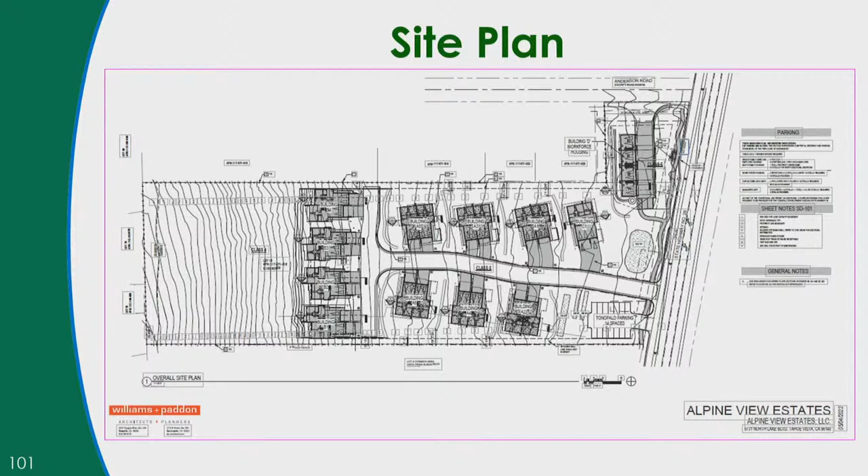The project was analyzed for land use and zoning consistency, and an addendum to the adopted mitigated negative declaration was prepared to satisfy the requirements of CEQA.

To summarize the analysis, the project complies with the density requirements of the Placer County Tahoe Basin Area Plan Mixed-Use Gateway West Zone District, which is 15 dwelling units per acre for residential units and tourist accommodation uses. Existing uses along North Lake Boulevard and Tahoe Vista include transient lodging and residential development, so the proposed project is consistent with the character of the area.

The Tahoe Basin Area Plan encourages tourist-oriented uses in the mixed-use Gateway West zoning, and the project proposes more than the 50% open space required by timeshare projects. Frontage improvements are also proposed as required, including sidewalks, curbs, and a new bus stop shelter.

In terms of TRPA consistency, the project modifications must also be reviewed and approved by the Tahoe Regional Planning Agency for compliance with their code. The modified project before you today has been reviewed by a TRPA planner, and a conditional plan revision permit was issued in February. The plans and permit have not yet been finalized, but the conditional approval is for 20 tourist accommodation units.

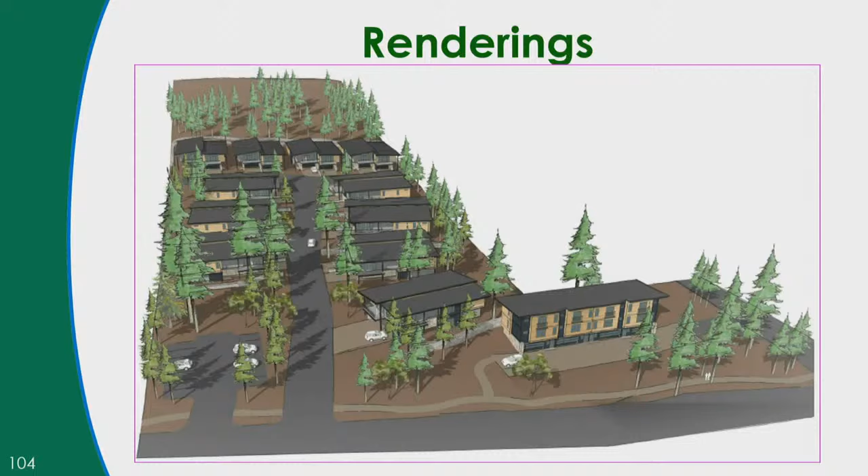And so finally, I have a recommendation to the Planning Commission to adopt the addendum to the mitigated negative declaration prepared for the Alpine View Estates project and approve the conditional use permit modification, minor boundary line adjustment, and design site review agreement based on the findings and subject to the conditions of approval in the staff report, and amend condition F of the design review agreement to read that the finished side of the fence will face the neighbors, and they have also concerns about their existing fence and that it will remain. And with that, I have time to answer questions if you have any.

Okay, questions? I have a quick question. Are the new timeshares that they're proposing a part of the Tonopalo? They are not part, they're separately owned. The parking lot is dedicated to the Tonopalo project through a deed restriction on the property, if I'm not mistaken.

Thank you. Regarding that Tonopalo parking, now you have two entrances off the Tahoe Boulevard. So is there a reason you can take it off the project roadway so we can reduce the number of entry points onto the road? The project as proposed today mirrors what was reviewed and approved in 2012. And I know that it was a discussion at that time and that Caltrans was involved to basically sign off on the two encroachments. Why the project proponent doesn't design it differently is, I'm not sure why.